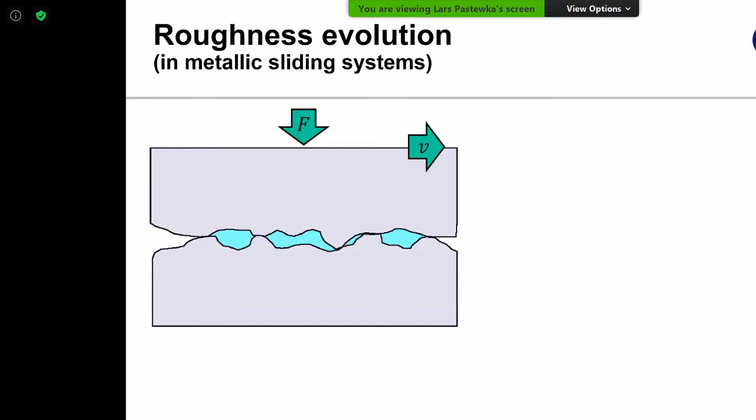Sorry, Lars, can I just stop you a second? The screen is slightly the wrong shape. Hopefully everyone can see all of the slide now. Just give it about 30 seconds, Lars, to make sure everyone can see everything. There was a bit of the slide cut off. That is probably not a big issue. Should I continue? Give me 2 minutes, a little less than 2 minutes.

Okay, yeah, that looks better. Okay, yeah. So let me continue. So the surface roughness and friction.

So the picture that's typically drawn looks like this: two surfaces touching each other, two rough surfaces, and of course the area of intimate atomic contact is limited to the peaks of the asperities of the two mountain ranges that touch here. Then we have a force pushing them together, and of course a sliding velocity, so this all happens under external load.

What happens, in particular in metallic sliding systems, is that of course the surface deforms. What you see down here is a picture I've taken from David Rigney's work, who has looked at mechanically mixed layers for much of his career. The picture that's typically drawn is that of a plastically deformed zone, and what these lines indicate is sort of the shape of the plastic deformation.

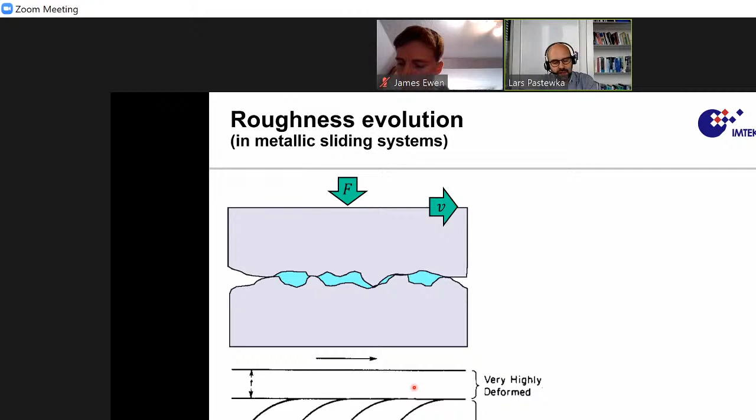It seems to indicate that plastic deformation is a laminar process. There's, of course, if you look at this carefully, something called a very highly deformed region where something else may be happening. But let's pause for a second and think about what it would mean if the plastic deformation was really a laminar process.

So we have these rough surfaces, we have these asperities touching, and because of plastic deformation, what would happen is these asperities deform and flow to fill in the void region that you see here. So it's probably to be expected, in a naive way, that the two surfaces would at some point become perfectly flat. And of course, they don't do that.

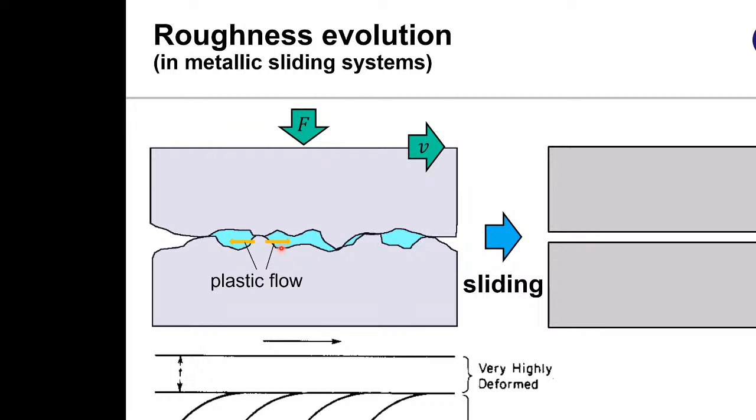I'll show you in a second an experimental example where this is shown. The reason they don't do this, and what I would like to focus on today, is that subsurface plastic deformation is not a laminar process. This idea of plastic flow being laminar, which is encoded in continuum models, J2 plasticity models of deformation, is something that doesn't work at small scales.

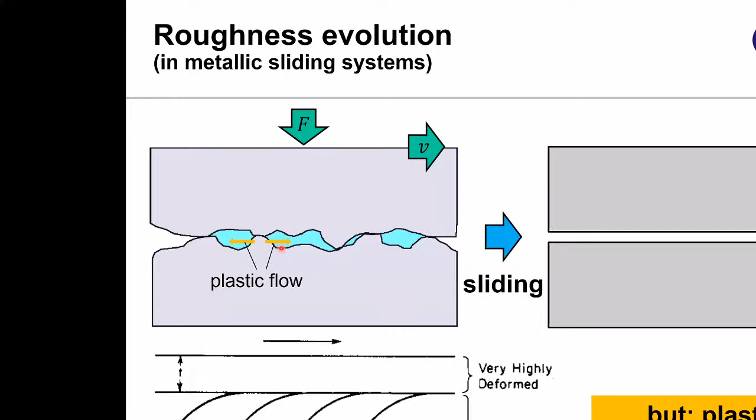So I promised a little bit of an experimental result.

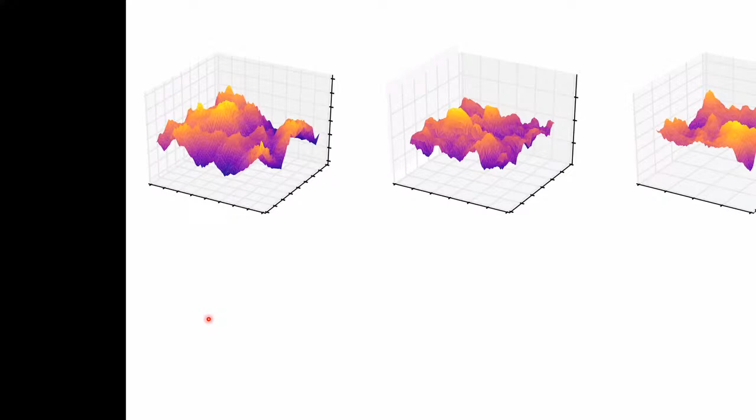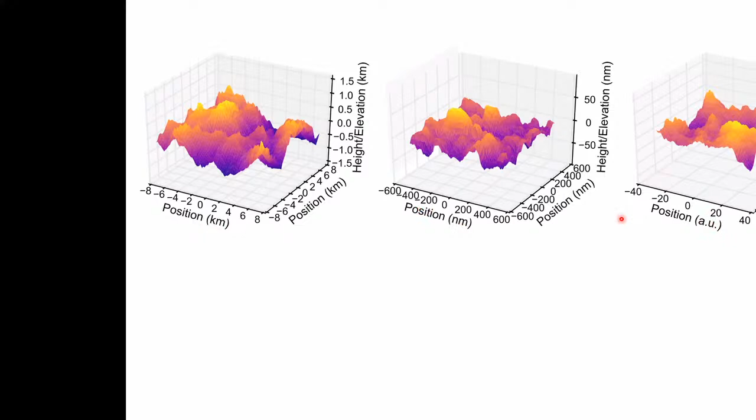So if I show you the scale of these measurements, it immediately becomes clear that this is something completely different. The left one is in kilometers, this one is in nanometers, and this is AU, arbitrary units. The left plot is actually a section of the Alp mountain range. This is an AFM scan of an ultra nanocrystalline diamond surface from Tevis Jacobs' group in Pittsburgh, and this is a computer generated surface that I generated in the computer.

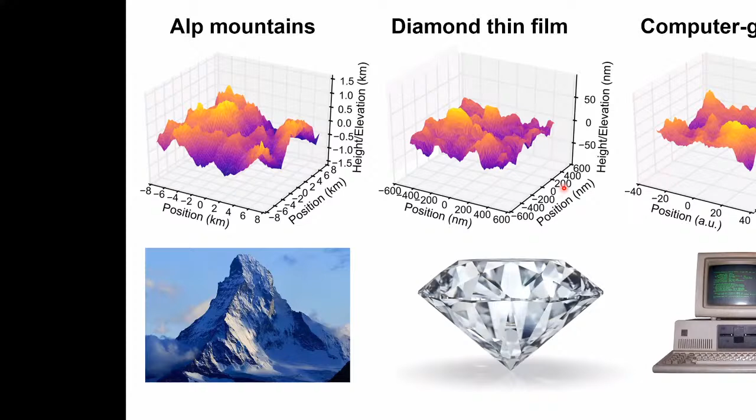So the goal of this exercise is to illustrate that if I take something really large scale, this Alp mountain range, and rescale the positions by a certain factor, and rescale the heights by an appropriate factor, then I get something that is virtually or statistically indistinguishable from something like this ultra nanocrystalline diamond surface. That's a property called self-affine scaling, in this case, statistical self-affine scaling.

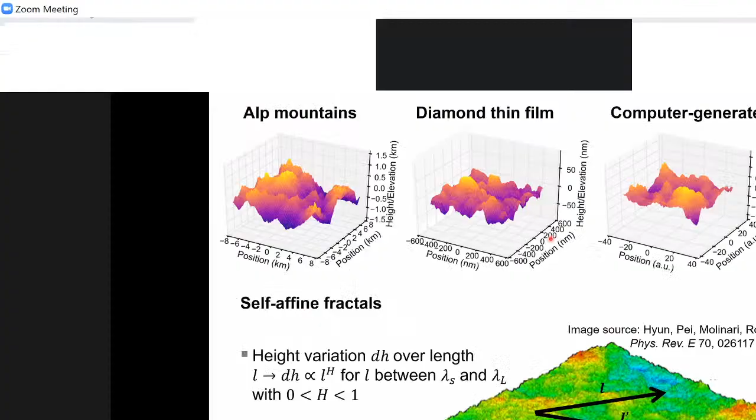And what I've just illustrated to you in a visual manner can be made a bit more formal. We can ask the question: if we look at a surface, what is the variation in surface heights, or the difference in height between two points? Imagine I'm sitting at the point to the left of this black arrow, and I ask what is the difference in height to a point at the end of this arrow. I do this for all points a distance L away. Then what I get, of course, is something that looks like a rough profile.

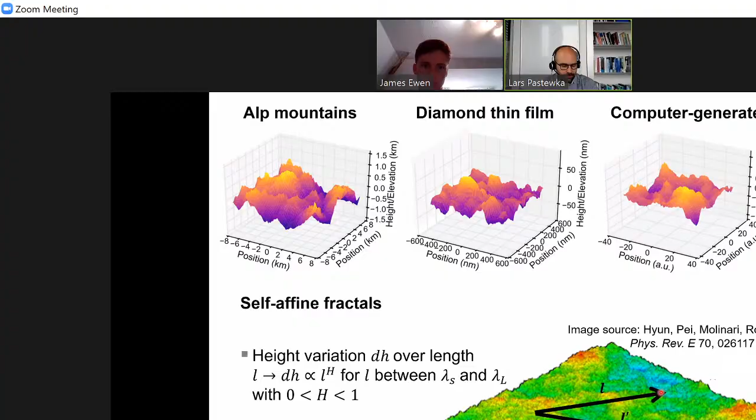So I get different height distances depending on where the arrow sits. But I can ask the question: what is the amplitude of that height variation at a distance L? It turns out that for many surfaces, particularly those with self-affine scaling properties, this height variation delta h scales with the distance to some power of capital H, called the Hurst exponent, and H is between 0 and 1.

This seems to indicate that these distances grow unbounded, but let me illustrate that this is still a flat surface. If we ask what is the mean height over this distance L, so delta h over L, then we get scaling like L to the power of H minus 1. This is a negative number, so it actually goes to 0 as we look over larger and larger distances. So these are nominally flat surfaces.

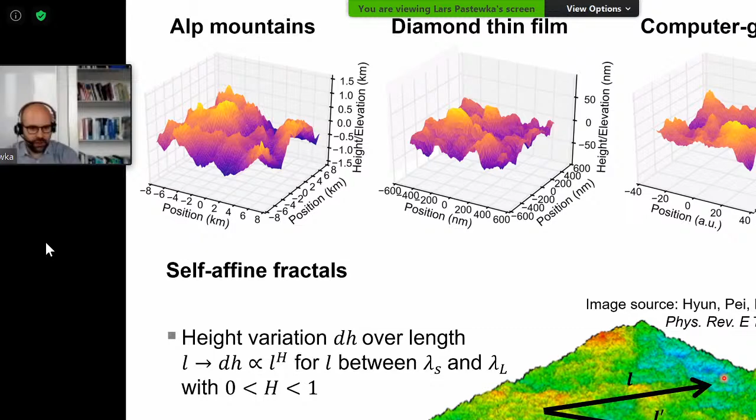This is one way of looking at this self-affine scaling. There are different ways of detecting this. This would correspond to computing something called the autocorrelation function, the height difference autocorrelation function on the surface.

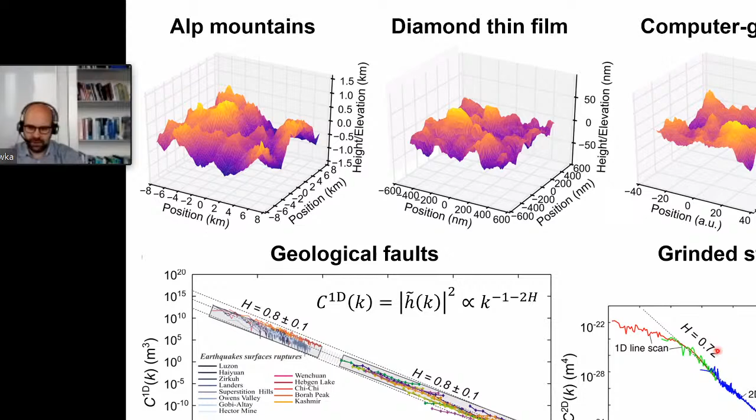So why is this the case? What are the origins of surface roughness? There's different things that have been done in the past, and a lot of work in the literature on surface growth. If you think about CVD or PVD growth, there are growth models the physics community has looked at, and they do lead to self-affine surfaces, often with a Hurst exponent around 0.5.

The two most famous models are probably the Edwards-Wilkinson and Kardar-Parisi-Zhang models. But the surfaces we look at are mostly not grown. There are erosion models that also predict self-affine scaling; one example from Persson's work predicts a Hurst exponent close to 1.

But I would like to argue that most of the interfaces we look at are actually interfaces that have experienced deformation. They have been machined, polished, and then used in a tribological context, so they have been worn down, experiencing plastic deformation and fracture. So why would deformation lead to surface roughness?

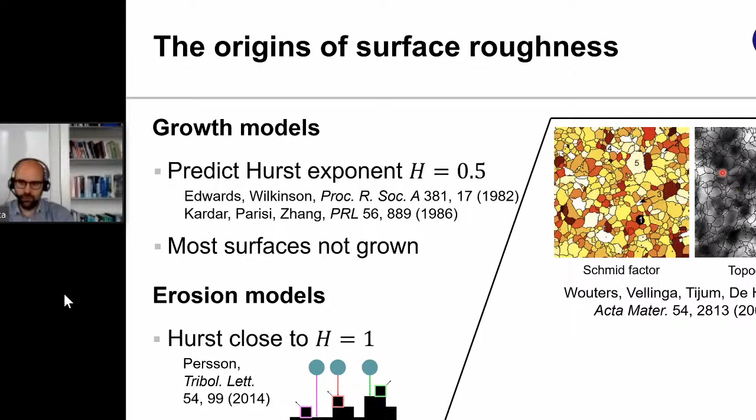The very traditional view of how roughness emerges, in this case in a polycrystalline metal, is: imagine you have a microstructure such as the one shown on the top right, where color indicates grain orientation—here a Schmid factor, which tells us how the grains deform. Let's assume the grain orientation is different, so some grains deform easily under an applied load, while others are more resistant. This leads at the surface to the evolution of a topography, shown in this red image on the right.

I will show you later that we think this doesn't give rise to self-affine surface structure, while it does give rise to surface roughness.

There's some very interesting work now on single crystalline materials. The material microstructure represents material heterogeneity. What you see here is the autocorrelation function of a surface scan, experimental work from Michael Zaiser's group, now in Erlangen, from the compression of single crystalline potassium chloride and lithium fluoride samples. On these single crystalline samples without any heterogeneity, you still find surface roughness after deformation that is self-affine, with a scaling exponent or Hurst exponent close to 0.8.

So we took these ideas. Michael Zaiser has these experiments and has done some modeling of these systems, but nobody has looked at this before with molecular methods. So we said, why don't we just set up a very simple molecular dynamics calculation?

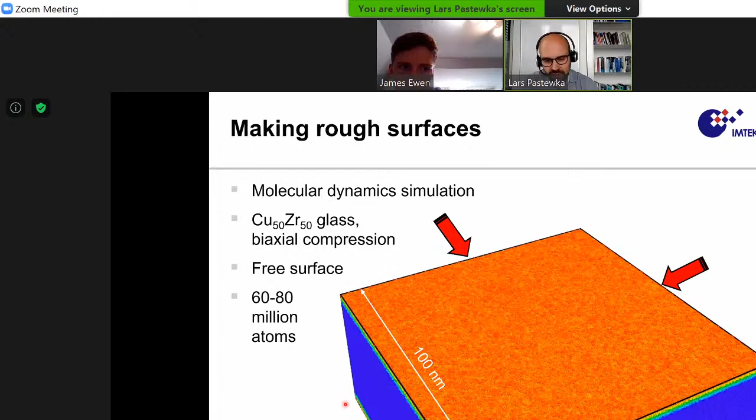This is a homogeneous piece of material, in this case a copper zirconium glass. It's actually a slab with two free surfaces. What you see in red on top here is one of the free surfaces, and the other is at the bottom. We expose it to a very simple type of deformation: compressing it along the axes indicated by these red arrows. In this laminar idea of deformation, the slab should simply become thinner and this surface should move up.

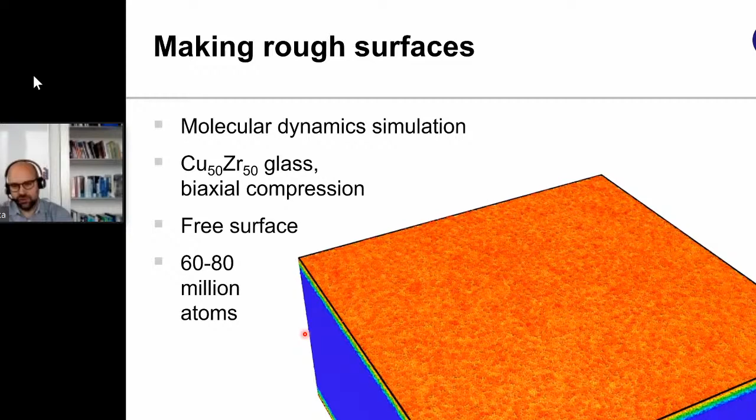But let me run this calculation for you. What you see is that even though this material is perfectly homogeneous, what we find at the surface after this calculation is that the surface has become rough. So there seems to be something intrinsic to the deformation process that leads to surface roughness.

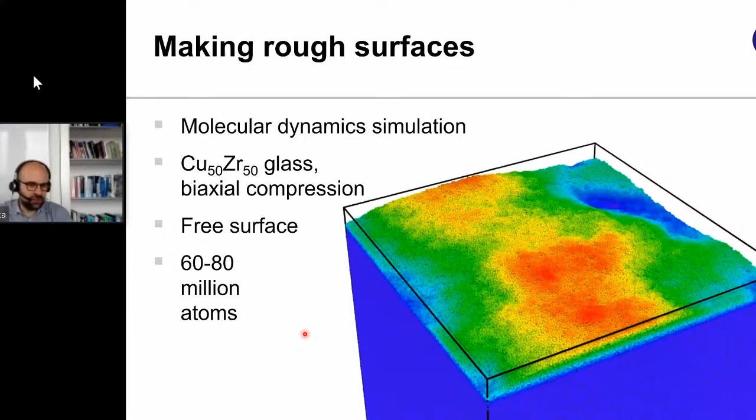Now the glass is homogeneous, but really at atomic scales there is glassy heterogeneity. So we did these calculations for three different types of systems: single crystalline gold with 111 surfaces, a high entropy alloy, and this copper zirconium glass. These systems represent different limits of order: perfectly ordered single crystalline gold, where each atom sits next to each other; the high entropy alloy, an FCC lattice but with random elements—nickel, cobalt, iron, and titanium—having stoichiometric disorder with the composition shown here; and the glassy material that has disorder at the atomic scale.

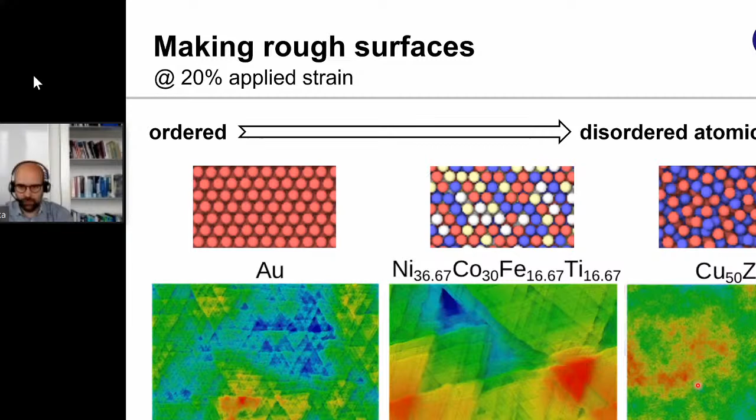All of these develop surface roughness. On the crystalline system, you nicely see these little triangular structures that represent the lattice plane of the crystal. What you see here is a 111 surface, and these are actually the slip planes of dislocations that exit the surface—I'll come back to that in a second. This is the high entropy alloy, which looks similar, and the glass is smooth. While running these calculations, we can monitor stress and also the surface roughness.

These plots show on the x-axis the applied strain in the system. The top one is a classical stress-strain curve. There is an elastic regime, and then we see huge stress overshoots for the crystalline systems because they are defect-free. This is, of course, somewhat of an artificial situation, but it's exactly what we wanted to test. Then these materials flow at almost constant stress as we continue to compress.

This is the root mean square surface height, the amplitude of the height fluctuations. If this is a line scan of our height, it would tell us by how much the amplitude varies—I'll show that to you in a second as a function of scale. This is the height measured over the full size of the samples shown here, initially 100 nanometers by 100 nanometers. You see that the roughness increases as we strain it, but yield is the point where it first emerges. Before the material has yielded, in the elastic regime, there's no surface roughness.

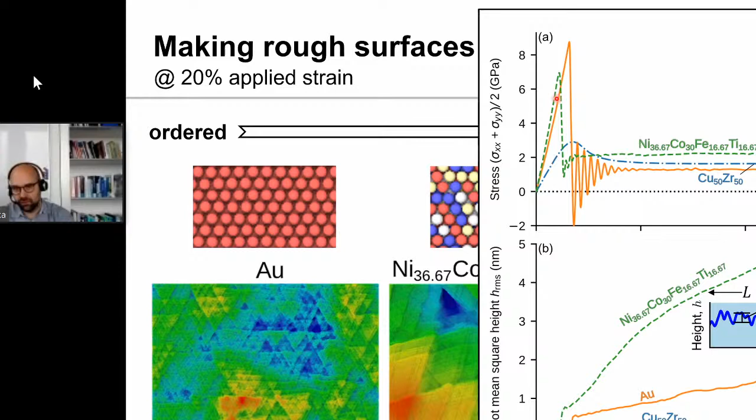of the surface topography. So we can actually do a little more detailed analysis. This HRMS is simply the width of some underlying height distribution function. We can now look at the full height distribution function.

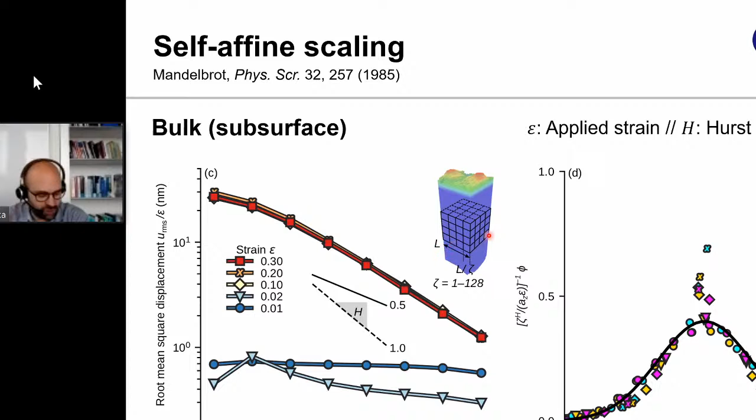And we see something very similar to the surface. We can collapse that onto a single universal curve. So what we see at the surface is nothing else than a signature of the non-affine or non-laminar deformation profile of the subsurface deformation in these systems.

I'll come back to the gold in a second. The gold gives us almost 0.5, and I would like to illustrate why that is with a very simple explanation of what we are seeing here. The copper zirconium is something we are still working on, it's actually highly temperature dependent. I don't have the data on these slides.

Okay, just comparing to Michael Zaiser's work that I've shown before. This was the scaling on potassium chloride and lithium fluoride. This is close to what we find actually for these multi-component alloys in our systems.

Okay, so what's going on here? Why do we get self-affine scaling? It's actually very simple to explain for a crystal in which the dislocations move uncorrelated. If we have a dislocation as the carrier of plastic deformation in a crystalline material, when that hits the surface, it will leave behind a step on that surface, a step with a height that's correlated to the Burgers vector of that dislocation.

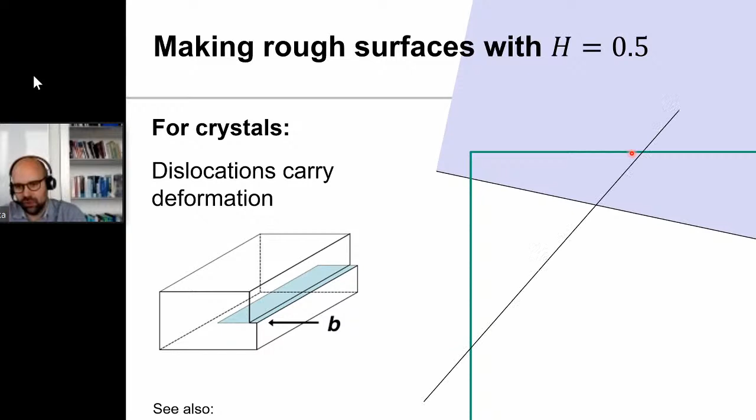So let's make a rough surface on this little square that you see on the right. I'm just throwing onto the surface a random step. When I come from here, when you see my pointer, I'm moving towards the step, I would move up by a little bit by Burgers vector when I move over the step. And now we do this randomly on the surface, and we get a surface that looks like this. Here, the directions are simply chosen from the slip directions on an FCC 111 surface.

But if I look at the power spectrum that I get, I actually get something that is H = 0.5. This makes perfect sense, because what I'm doing, if I'm scanning across this surface, I'm just moving up and down in a random fashion. So this is a random walk, essentially. And random walks are well known to have these scaling properties.

We can also look at this in terms of the Fourier transform, looking at the Fourier transform of a step function. This is 1 over q, and this leads to the H=0.5 result. This is sort of trivial for metals in which dislocations move uncorrelated - you can reconcile it with a laminar idea of material deformation. When the dislocations become correlated, this gives rise to different values of the Hurst exponent.

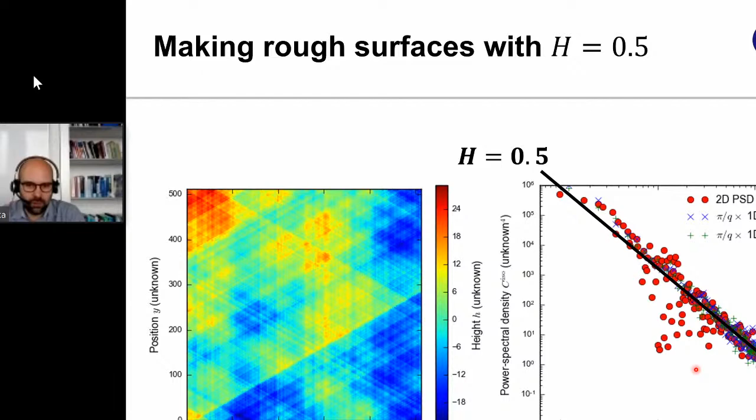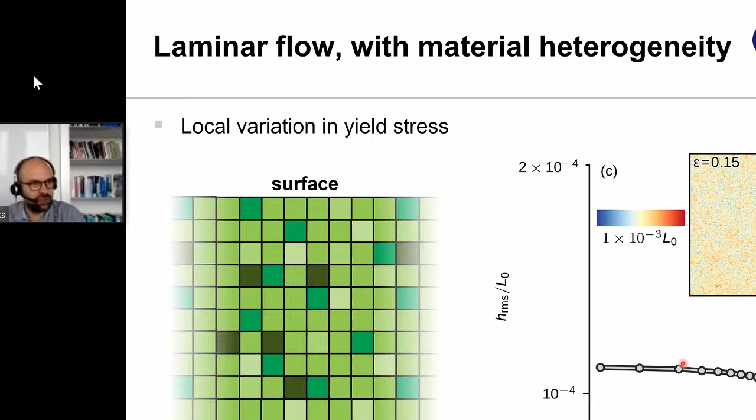Coming back to this question of what happens for laminar models - this is a continuum calculation we've carried out, assuming we have a heterogeneous material in which the yield strength in subsurface volumes, indicated here by colors, differs randomly. Then we compress it. We get a random surface shown on the top right, but our scaling plot does not show self-affinity. So this is the picture of different grains and orientations deforming and giving rise to surface roughness.

I hope I could convince you that this idea of laminar flow doesn't make sense at small scales, and that there is a mechanism that actually leads to the creation of new surface roughness.

Let me, for the last couple of minutes I have, talk about brittle materials. This is, of course, a mechanism that depends on plasticity. What happens if the material is brittle, if we have cracks in the material?

The first point I want to make is that plasticity is a question of scale. This is a picture taken from an old 1949 paper, in which Taylor did an indentation experiment and noticed that with very small indents on soda lime glass, the glass behaved perfectly plastic, while for deeper indents it would fracture.

If you look into fracture mechanics, the stress near a crack tip becomes very large, and there is always, in most materials, a region often called the process zone, in which something happens that is not elastic deformation but plastic deformation. So at small scales, even in cracks of brittle materials, you will have plastic deformation.

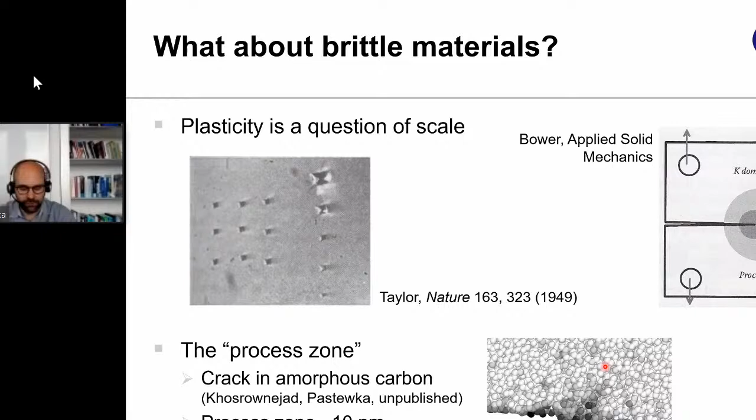So you have to do something, and this leads me to some beautiful calculations from the group of Ramin Aghababaei, who is now at Aarhus, and Jean-François Molinari at EPFL, who used a specialized model. They call it molecular dynamics - I would probably call it a discrete element model, sorry Jean-François if I'm deviating from your nomenclature. But what they did, and what is very clever, is they designed their model so that the process zone is small, allowing simulation sizes much larger than the process zone size.

This is one of their calculations from Nature Communications published last year, in which they set up a rough surface. They slide on top of each other, and they see the formation of these wear particles. But what they did in this paper is they actually analyzed the surface roughness after their sliding calculation finished - they slid for a very long distance. The right-hand side shows the power spectral density of their surfaces.

The power spectrum is a function of Q, and they also find self-affine scaling with H between 0.5 and 1, on the order of 0.7. So this means at small scales we have plasticity - there are intrinsic plastic processes, like the ones I described to you.

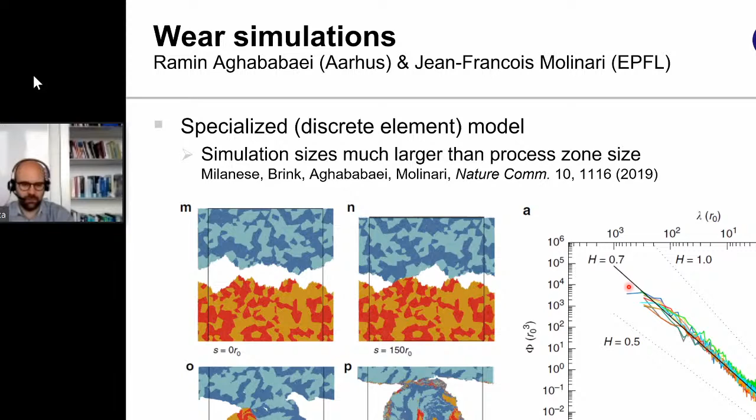At larger scales we have fracture mechanics, which is sort of the gist of this model. This seems also to be corroborated by experiments. These are two examples from the literature. The left hand is a crack on silica glass from Laurent Ponson, Daniel Bonamy, and Elisabeth Bouchaud that shows there seems to be a scale below and above which the crack properties change. This is the delta H, the autocorrelation function as a function of distance. You see that these scaling properties change at some point, and this length scale probably corresponds to the size of the process zone. The right one is sliding rocks, again from Emily Brodsky's group, that shows something very similar: a length scale below which the surface becomes isotropic, above which it's anisotropic, but there's also a change in scaling exponent for some of the directions. So there seems to be a change in mechanism at something on the order of the process zone size.

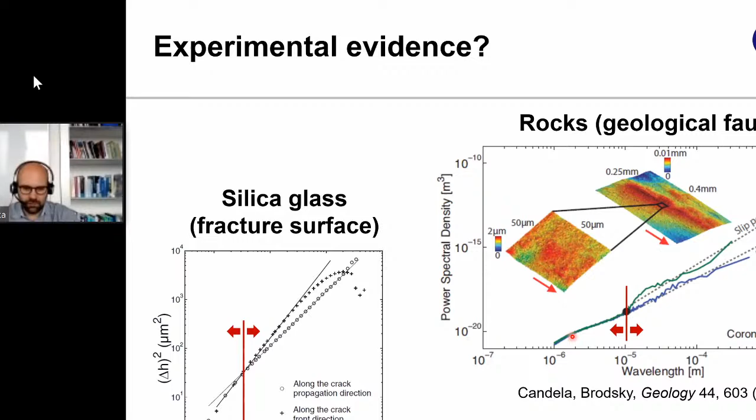What I've talked mainly about today is the mechanism for the evolution of small-scale roughness. Jean-François and Ramin have done beautiful work on what happens at larger scales, which is what has happened recently in the simulation community. What's left to be done, of course, is to think about how this can be translated into experiments and what practical implications this has. But I think that thinking about how the surfaces we work with, or the morphology, actually develops and evolves, and that morphology, in the end, controls friction and wear and other things, is important and is something we should continue to think about.

So with that, I'm at the end.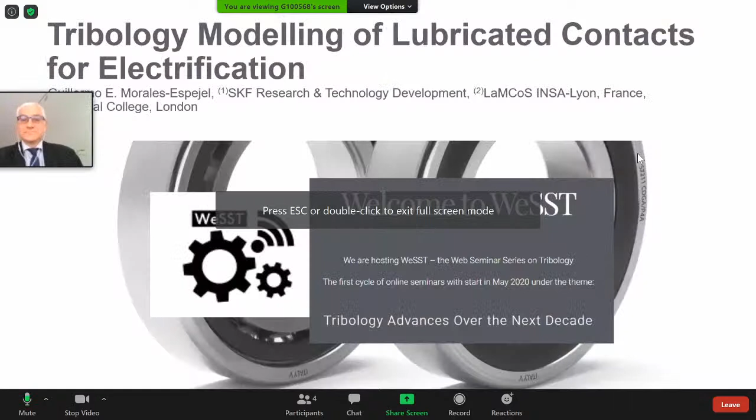Thank you very much, James, and thank you for the invitation, Chiara and James, to participate in this webinar. I will talk to you about tribology modeling of lubricated contacts for electrification. This is basically a summary of the work we are doing in SKF to tackle the new challenges brought to us, mainly by electrical mobility, as you will see.

The presentation is divided into 4 chapters: we will discuss the challenges in lubricated contacts, modeling of lubrication, modeling of failure modes, and then at the end, modeling of life of these contacts.

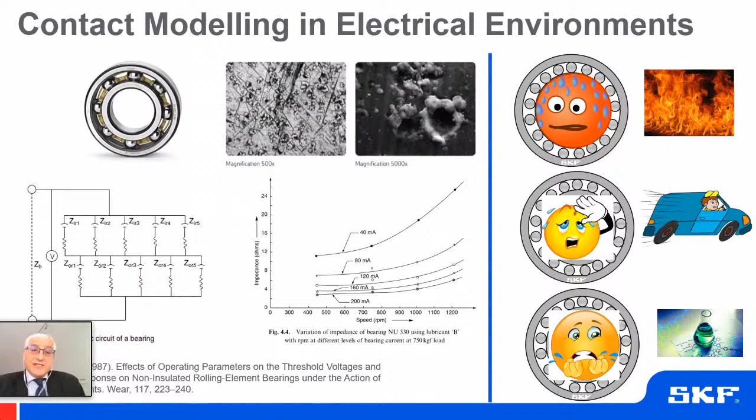Let us take the first one: challenges in lubricated contacts for electrification. When I was designing the talk, I had this dilemma whether to focus on describing the actual process of damaging a contact through electricity and modeling the electrical circuit, or focusing more on the new challenges brought to us in the operating conditions for these contacts, like different temperatures, different speeds, and different chemicals. Since there is quite a lot of literature on this topic, I decided to go for the other one, the challenging application conditions that the contacts have.

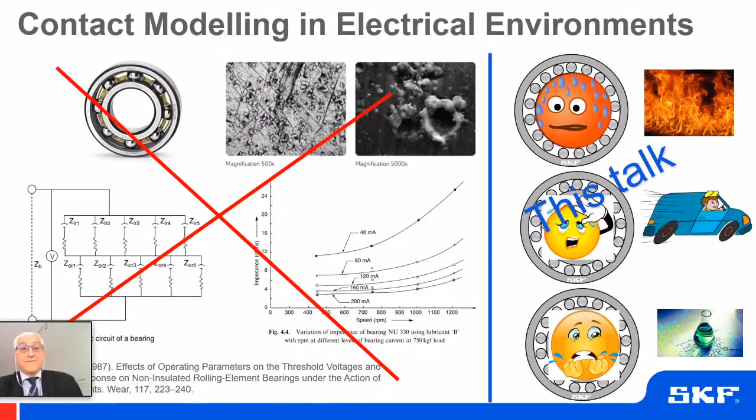So the first thing I would like to do is discuss briefly with you what are those tribological challenges brought to us by, for instance, full electrical vehicles.

If we start analyzing these vehicles, we soon realize that the electrical motors are sealed for life, and the bearings in the electrical motors are subjected to very high speeds, very high accelerations, and very high temperatures. That brings contact challenges about what to do to have long grease life, long surface life under variable conditions, and especially issues like surface distress, seizure, or adhesive wear that these contacts will see at very high speeds.

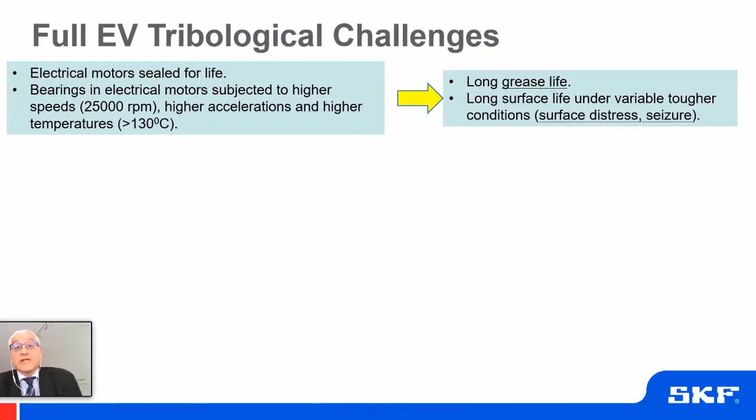There is another important element: these electrical motors are running at very high speeds in order to be efficient, and that brings also the possibility to introduce higher torque and higher loads in the contacts. So again, what to do about the life of the contacts under those conditions.

Then there is the fact that we are introducing quite a lot of new materials in the system, like copper wires, coolants, and advanced polymers. And then we need to deal with the compatibility with electrical currents and magnetic fields, which brings important challenges in the contacts because there are unforeseen consequences in lubrication. There is also the possibility of increasing solid contamination due to corrosion and the other elements we have there.

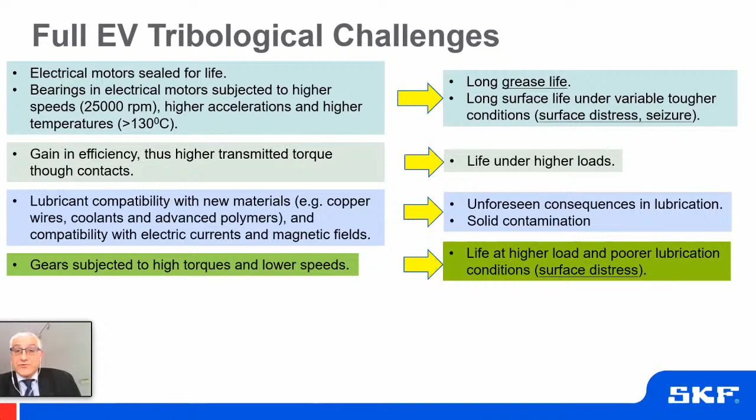Now, since we are running the motors at high speeds, there is also the need to lower the speeds in the system by having high transmission ratios in some gears. So some gears will actually be running at lower speeds and high torque conditions. That brings very tough conditions for the contact life, again regarding the life of those contacts under poor lubrication conditions and surface distress.

There is also the possibility of electrical damage in the contacts, fluting, electrical erosion, etc. And then we need to understand how this damage propagates in the surface.

Then we need to run these contacts with less allowed noise. We need to improve the lubrication conditions in the contact, but with the contradiction that we are more and more using lower viscosity lubricants. So surface distress is coming up again as an important potential failure mode.

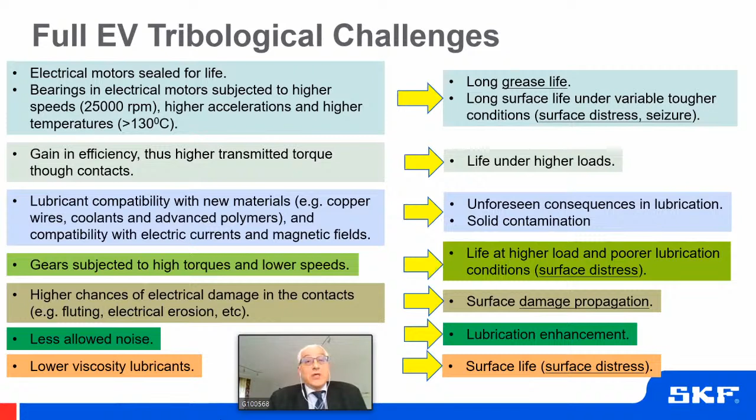Now, when we have hybrid electrical vehicles, we add an extra element, which is the combustion engine, but the conditions will not be too different from these ones. So I would like to move on to the summary of the new challenges.

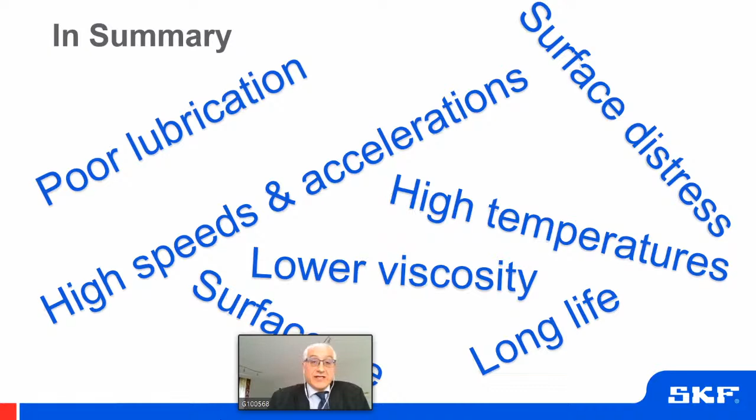We are talking about poor lubrication conditions in the contacts, high speeds and accelerations, surface life, high temperatures, surface distress, long life, and lower viscosity. This is the new reality when it comes to electrical vehicles. Now, even before electrification, we had already very important challenges in those contacts.

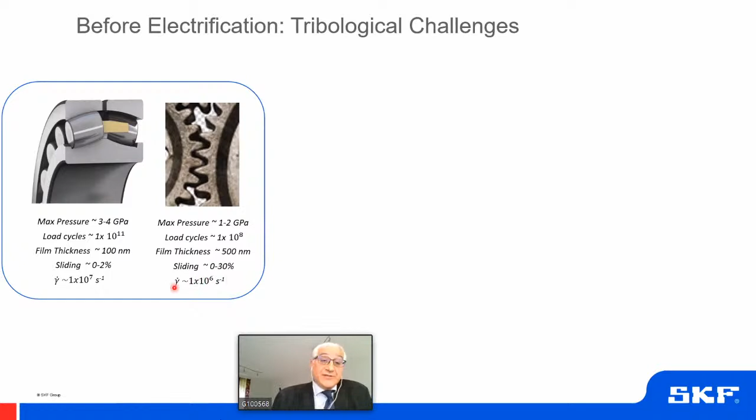Gears work under slightly lower loads, 1 to 2 gigapascals. The number of cycles we expect to endure is also a bit lower, 1 times 10 to the power 8. The film thickness is a bit thicker, but we need to remember that the roughness of gear surfaces is higher, so in reality the lambda ratio is about the same as bearings. The sliding conditions go from 0 to 30%, and the shear rates are a bit lower than bearings.

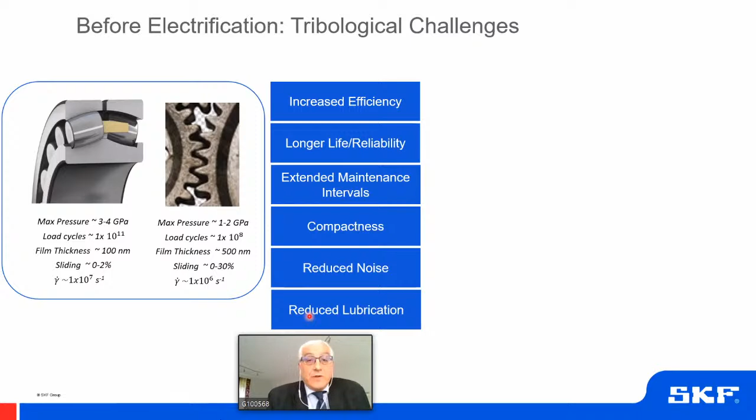All this, with the megatrends of increased efficiency, longer reliability and life, extended maintenance intervals, compactness, reduced noise, and reduced lubrication, together with the fact that at least in bearings the film thickness has been reduced over time, brings us to a situation where most of the failures we see in these machine elements are surface-initiated failures. So tribology was already important.

Now let us see how we really understand the lubrication in these machine elements, because if we understand the lubrication, we can understand many of the potential failure modes. We need to understand lubrication not only from the point of view of calculating film thickness and pressure inside the contact, but also what is happening outside the contacts, because that will actually determine in many occasions what actually happens in the contact.

If we are talking about simulating millions of load cycles, we cannot do this in the old-fashioned way using numerical techniques, because it takes too long for one calculation. We need a more pragmatic approach based on semi-analytical solutions, and this is what we have been proposing for many years.

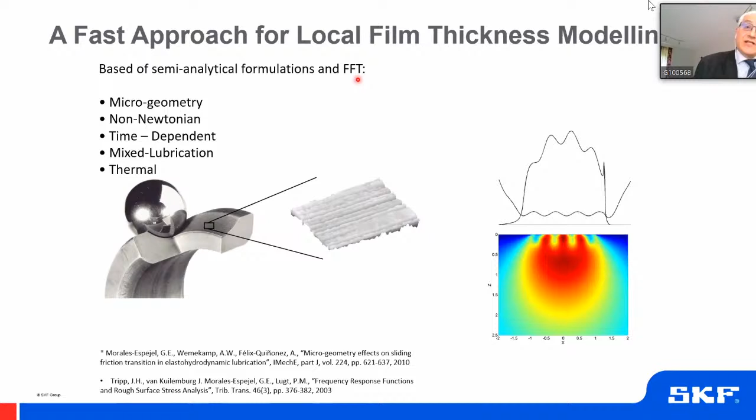Models that can actually consider the microgeometry of the contact, that also can model the non-Newtonian behavior of the lubricants, time-dependent solutions, mixed lubrication, and thermal effects, actually modeling the whole topography in a contact. To do that, we rely, as I said before, on semi-analytical solutions based on fast Fourier transform. I would like to give you a brief idea of the concept.

The actual model is a bit more complicated than this, but this is just to show the basic idea. If you have two rough, lubricated surfaces, they will produce a pressure distribution that has pressure ripples. We do not want to model the whole geometry of the contact because that is very time consuming. We want to focus on modeling only the ripples, the pressure ripples and the film thickness ripples. For that, we focus our attention on the central zone of the contact.

Here we have very high viscosities, and if we have very high viscosities, the Poiseuille flow term in the Reynolds equation tends to be small. So we can simplify this equation into just a wave equation, a transport equation, which is linear. And if we know the solution for a sinusoidal, we can apply the powerful Fourier techniques to solve any topography we want. Now, this is a very basic idea.

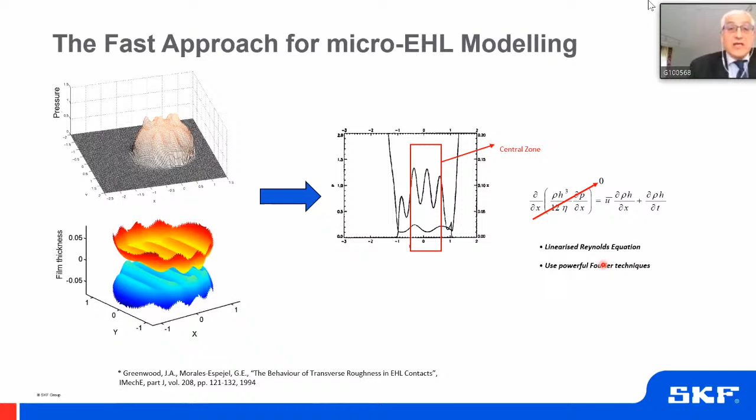The reality is more complex than this, because if you want to deal with non-Newtonian fluid, you immediately realize that you cannot totally remove the Poiseuille flow. Parts of it will have to remain in order to model the non-Newtonian behavior. So we need to calculate the equivalent viscosities in the two directions, but more importantly, the overall solution for the ripples is made of two important parts.

One is what we call the moving steady state, or particular integral, which basically describes the deformation of the roughness as it goes into the contact and the generation of these pressure ripples. There is another very important element that we initially ignored but then realized was important: the disturbance of the flow introduced by the roughness every time a ripple enters the contact. It produces a flow variation that travels through the contact with the mean speed of the lubricant. Adding those two together, we get the full solution of the problem.

A lot of the work on this is due to Professor Hooke from the University of Birmingham, who has been working hard to develop these complex models.

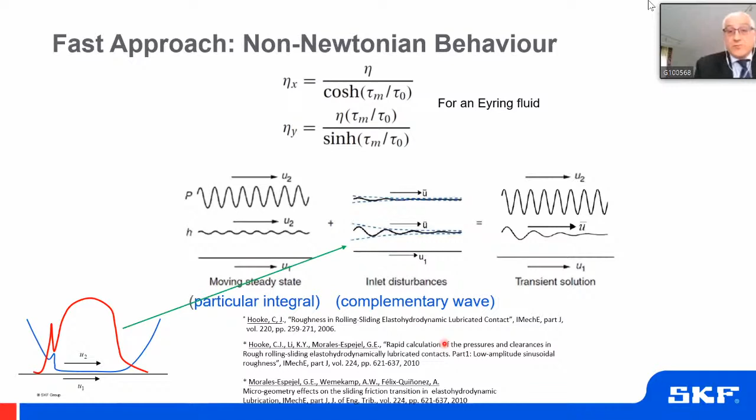Now, this is just an example of what the model can do. For instance, if you have an indentation on the surface, you can see that the indentation produces pressure ripples. You can also see the profile of the pressures and the stresses that that produces.

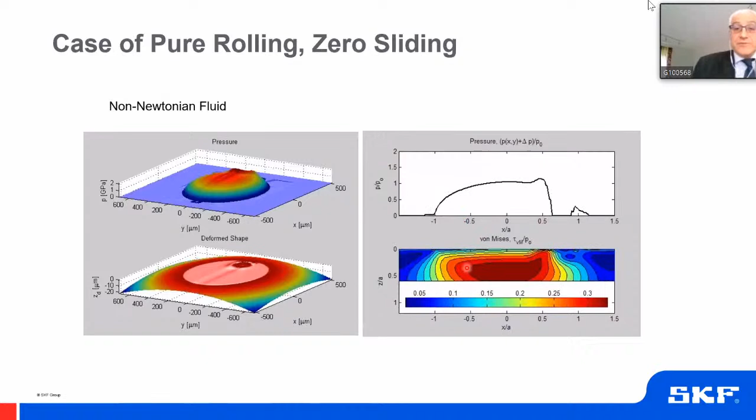And that has important consequences in fatigue as well. Now, we were talking about modeling what happens outside the contact. This is basically the product of what we call kinematic starvation. When we are running machine elements at very high speeds, there is a chance that we induce what we call kinematic starvation. A good example is a rolling bearing.

We define this quality of lubrication parameter, kappa, which is similar to a power of lambda, if you want to put it in more simple terms. Here you have the speed, basically the multiplication of the RPMs by the mean diameter of the bearing in millimeters. And that gives you a measure of the speed.

So we know that when we increase the speed, the film thickness will increase until a certain point, but then starvation will take control, and it will actually reduce the film thickness if you keep increasing the speed.

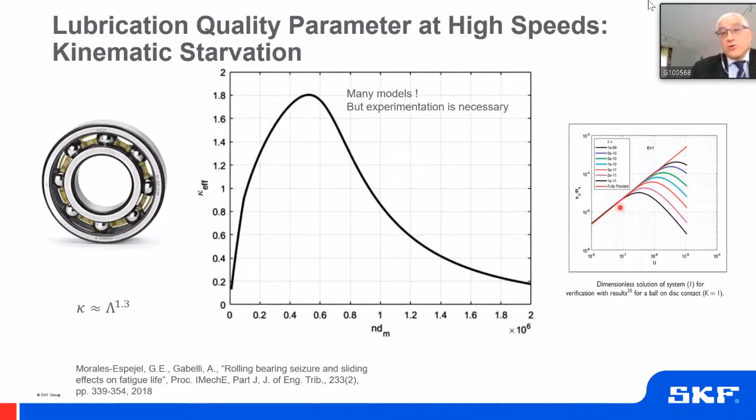This is an example of what is possible to do in the laboratory in a tribometer consisting of a disc and a ball. You can pretty much model the conditions when you increase the speed. You can model all starvation conditions, if you are clever enough, in a very controlled way.

Now, once we understand and can model lubrication in machine elements, it's time to move towards different failure modes related to the surface. One failure mode that we saw many times in our first slides is what we call surface distress.

It's also called micropitting, especially in the USA. We also call it gray staining, microspalling, surface fatigue, etc. It has many names, but it's basically surface fatigue at asperity level. There is a very good, well-known definition of this failure mode for rolling bearings in this ISO standard. There are also ISO standards for gears describing micropitting.

It looks like this when you have a surface. You see these shiny bands here. If you look closer, you see some pits. If you go into the microscope, you see some clear microspalls. And when you make a cut in the transverse direction, you see that these are really shallow cracks. This is typically what we call surface distress.

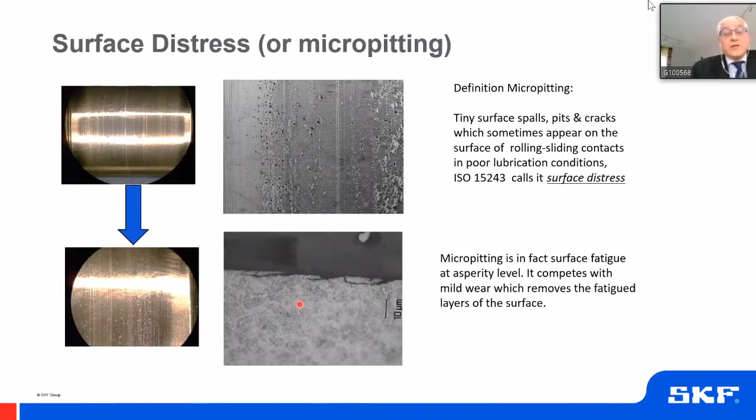It's important to say that although this is basically due to poor lubrication conditions and fatigue at asperity level, there is always a competition between fatigue and wear, the mild wear that modifies the topography only. If you have too much wear, you may not see surface distress. If you don't have any wear, you may see surface distress very quickly because you don't have enough flattening of the topography.

Something important to say is that this failure mode depends pretty much on the lubricant in your system. This is an experiment published in a paper with my colleagues, using a micropitting tester that has 3 rings and 1 roller in the middle. We try to induce micropitting, or surface distress, in the roller.

If you run an experiment with exactly the same operating conditions, the same roughness, and even the same oil, but just change the additive composition, you can expect very different behavior for the same conditions. That's precisely because the additives locally modify the friction coefficient and the wear coefficient, which has consequences for the stresses on the surface.

Another way to study micropitting experimentally is by introducing indentations on the raceways, because this immediately generates micropitting around this displaced material, especially in the area that is normally the exit of the overrolling. If you have a ball overrolling in this direction, this will be the exit point, which we call the trailing edge of the dent.

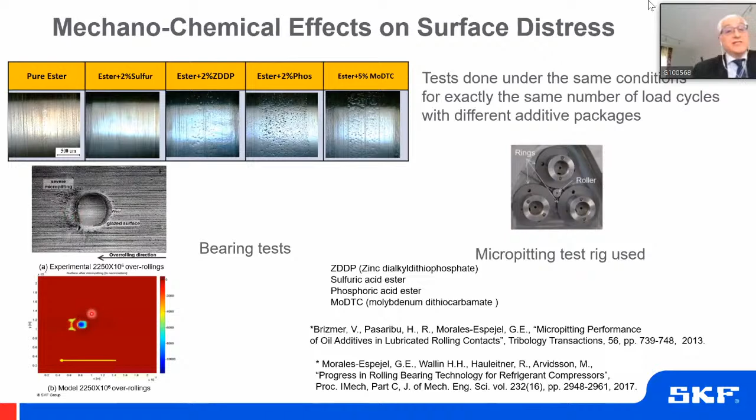Normally here you generate more surface distress, as can be modeled as well—the model will also give you more surface distress here. This is due to the fact that we have slightly higher hydrodynamic pressures at this location.

But if you really want to model this phenomenon, you need to take into account many things. You need to take into account the actual topography that you are testing, and also the build-up of the tribofilm layer from the additives.

For that, we use the work of Zhang and Professor Spikes at Imperial College, who established that the tribofilm layer reaction depends on shear stress and temperature. It's important to say this because in the past we believed it depended on pressure, but he has shown it depends on shear stress. So we need to be able to calculate the local shear stress.

This generates a patchy tribofilm layer, as indicated in this rough diagram, where we see areas separated by lubricant, and other areas which are more like dry contact. Therefore we have locally different friction coefficients and wear coefficients, because it can be the case that you have dry contact between tribofilm layer and tribofilm layer, tribofilm layer and steel, or steel and steel.

So you need to be able to measure these friction and wear coefficients in lab experiments. But once you have that, we can use this model. You basically measure the tribofilm layer, you measure the topographies, and we introduce these topographies into the mixed lubrication model, the fast mixed lubrication model, together with the lubricant rheology.

Together with the operating conditions and the material, we are able to calculate the stresses and eventually the stress history of the roughness going through the contact. With that, we go to a fatigue criterion to assess the damage locally and accumulate this damage over time. If we have reached the number of load cycles, we report the results; if not, we increase the time.

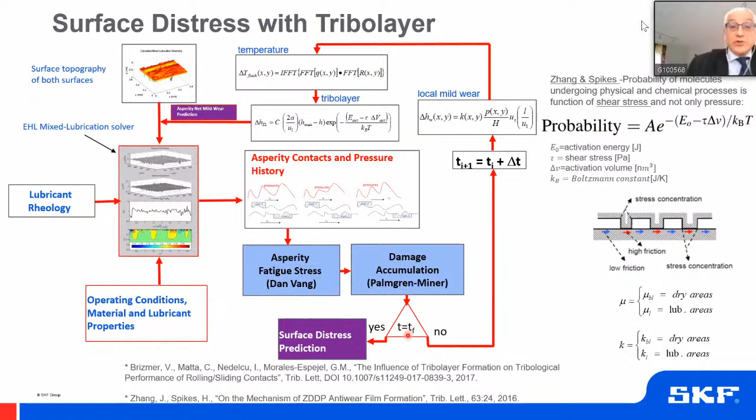We apply a local wear model, calculate the local temperatures, and calculate the local increase of the tribofilm layer. Then we repeat this process many times until we reach the simulation time. Interestingly, at the end of the day, we can basically simulate things like what we see in the experiments.

Again, our tester here—this is a topography we started with. This is just a very short snapshot in time of the shear stresses at the surface calculated by the model. You can see how the tribofilm layer grows on the rings and on the roller, and it's much faster on the roller because it sees many more cycles.

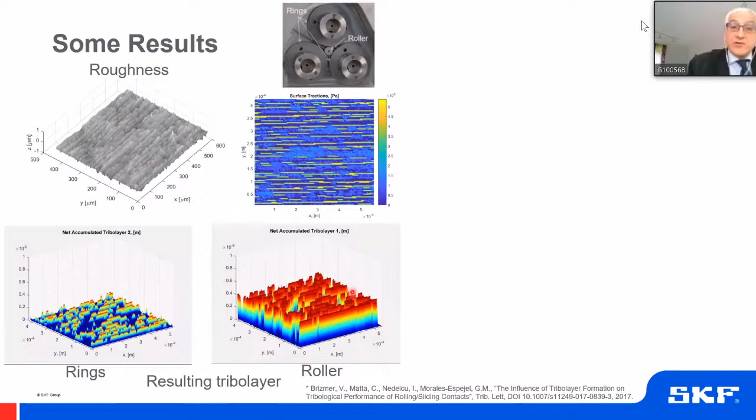But the important thing is not to stop here, but actually to try to make the link with performance, because at the end of the day, this is what we are after.

For instance, it's interesting to simulate the same oil with a typical additive, ZDDP, but at different temperatures, and then compare with the experiments. We know that at higher temperatures this additive is more reactive, so you generate thicker tribofilm layers, which prevent wear but more easily induce surface fatigue. This is what you see in the experiment.

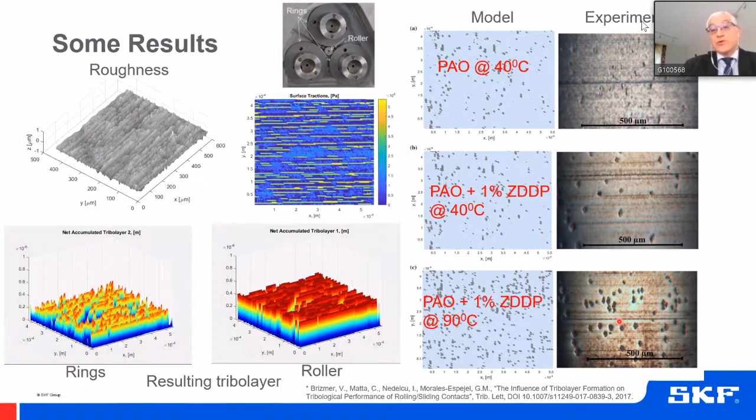Now, the material so far, the steel has been considered homogeneous. We have seen in the previous presentation that it is far from homogeneous, and we are trying to get closer to simulating different aspects in bearing steel and gear steel. For instance, it is made of different phases oriented, or different crystals oriented in different directions, having different properties, and it has inclusions, it has carbides, etc.

So we have done that with the help of our colleagues in the University of Twente, with Professor Kees Venner, where we can actually model in a simple PC computer up to 500,000 nodes or even more, depending on the modeling, if it is transient or steady state.

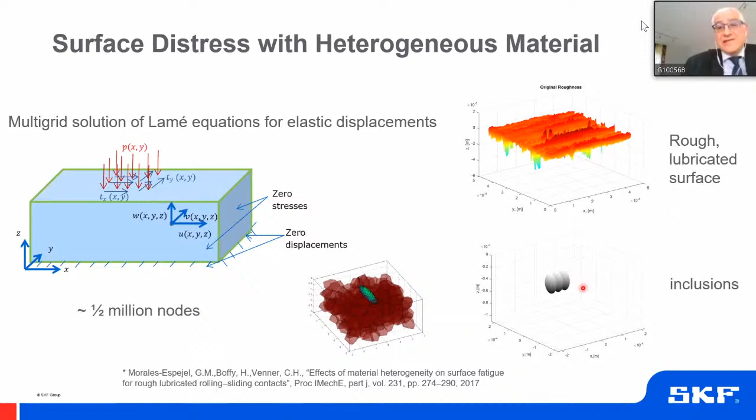And what we try to do here is to take a typical bearing topography, and then we introduce some inclusions made of a stiffer material than the matrix, and then let us investigate what happens with those. So you can see that this is a lubricated problem.

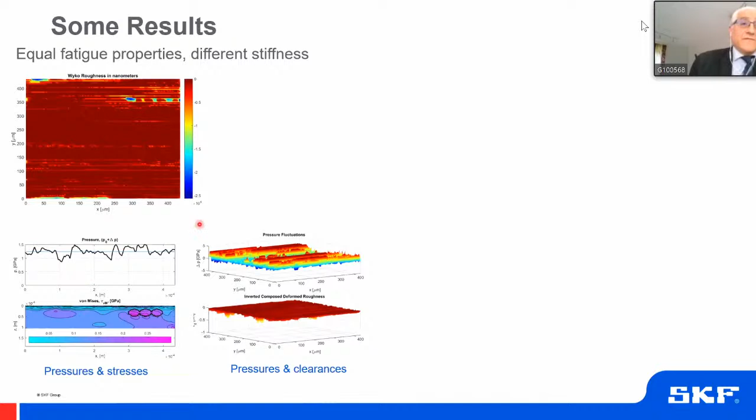So you can see the hydrodynamic pressures here. You can also see the inclusions and how they concentrate the stress because they are stiffer than the matrix. But for this particular case, you see the clearances and the pressures. For this particular case, we did not generate a failure.

Now, the same condition, but now we introduce equal stiffness, so you will not see this stress concentration because the stiffness is the same, you can see here. But now we introduce lower fatigue properties in the area where we have the inclusions, and then you generate the failure immediately here. You can see the failure.

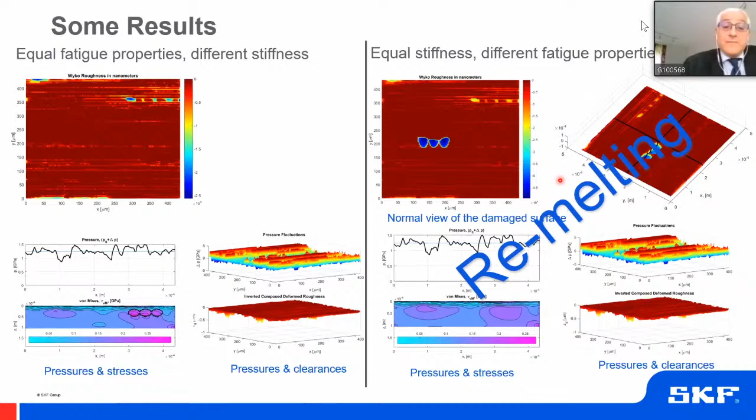And this is typically what you will need to do if you want to model, for instance, the remelting of material coming from an electrical discharge in the contact. Once you generate a crater from electrical discharge, you basically remelt the material and you soften it, and it will have the same stiffness, but much lower fatigue properties than the rest. So it's interesting just for the record.

There is another important failure mode that we see appearing in these tribological conditions, which is what we call seizure failure mode, or other people call it scuffing, adhesive wear, or smearing, etc. There are many names, but here we refer to the adhesive wear really produced by contacts running at very high speed and very high load.

And if you remember the lectures in elastohydrodynamic lubrication, we see that in the past there were many people, and many people still now, running experiments increasing the sliding speed in the contact and increasing the pressure until the contact failed. It fails by a very quick increase in friction and then eventual catastrophic failure. This failure is a thermal failure, produced by high temperatures.

There is a sort of line here that you cannot cross, because the contact will fail. It depends obviously on the temperature at which you are doing the experiment, as well as the lubricant, the additives, and many other aspects, the roughness as well. But in reality, for every contact, there is one line here, and that is called the transition diagram.

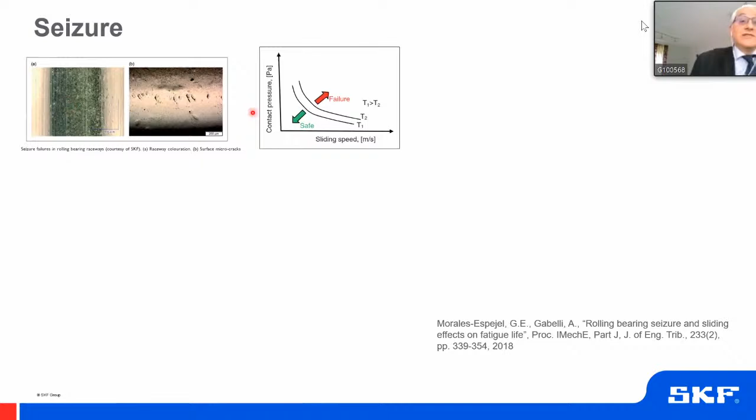Now, it is very important to develop these transition diagrams for specific machine elements like rolling bearings or gears. In a rolling bearing, you will see the failure starting to appear like this one, with tiny micro cracks here. But if you look into the raceway, you will see discoloration due to the high temperatures. This is an indication that this is not regular surface distress, but actually the beginning of what we call seizure failure mode.

The way to model this is relatively simple as well. You isolate the contact with the highest load. You need to model the starvation, because we are running at very high speeds here, so starvation is very important. From that, we calculate the percentage of metal-to-metal contact that we may have in a mixed lubrication model, an average friction coefficient, and then we can calculate, or you can use the local friction coefficient if you have a numerical scheme, and then we can calculate the local temperatures on the surface.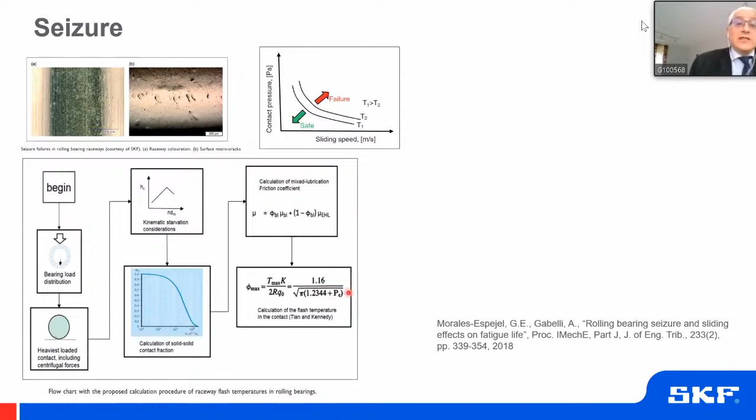And if you draw these temperatures versus speed and pressure, we get these isothermals, which is basically the transition diagram. The only thing you need to do is to run an experiment to know which of these isothermals is the one that you are looking for, as the transition diagram of your problem.

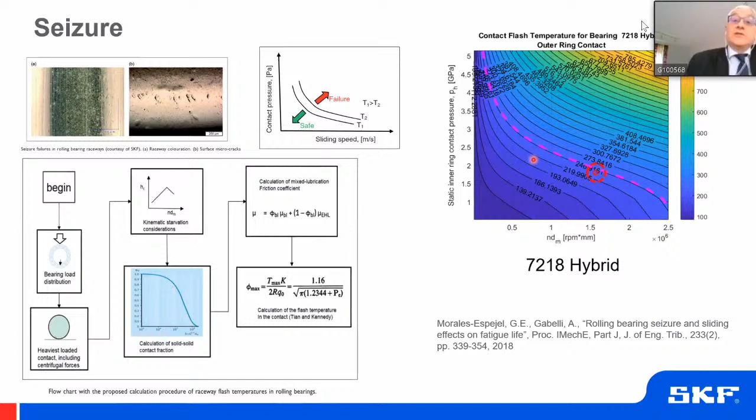And in this case, this is actually an experiment. It comes out to be around 250 degrees, more or less. But that can change with the lubricant that you are using. This is a very important tool for you, so as not to go beyond the limit of the machine or the machine element that you are modeling.

With this, we are getting closer to actually trying to calculate the life of the contacts. If you remember, the life of one single machine element like a bearing or a gear is almost impossible to calculate individually. You need to calculate the life of a population, because seemingly equal bearings have small differences, even if they are working under very similar operating conditions.

There are always small differences that will make the individual life of the elements very different from one to another. So what we normally do in bearings, and also more and more in gears, is to calculate the life of populations. In this case, we calculate with 90% reliability. This is why we calculate the L10. It means that 90% of the machine elements will survive this life.

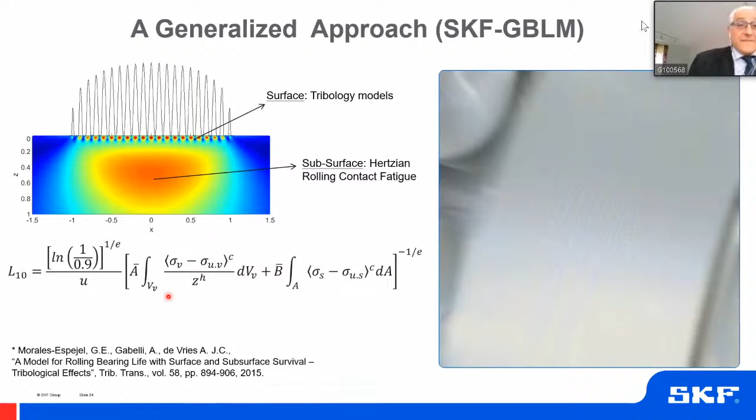And the way we used to do that in the past was basically by using subsurface fatigue, Hertzian stresses, and that will give us this damage integral that eventually will give us the life. But more and more, we realize that the surface is important. Before, we used to penalize the subsurface fatigue with a factor here due to poor lubrication or contamination or something else coming from the surface.

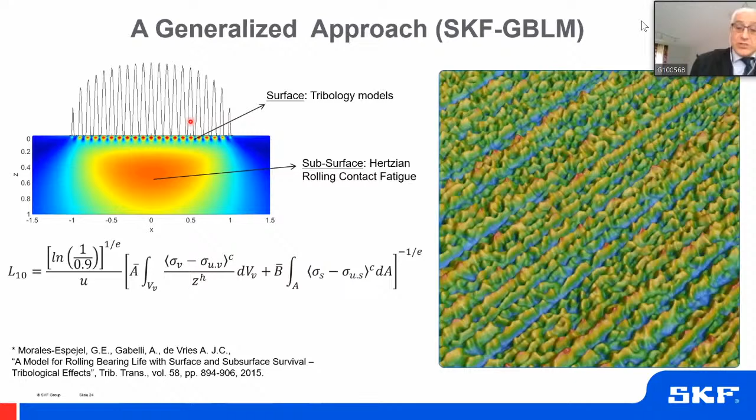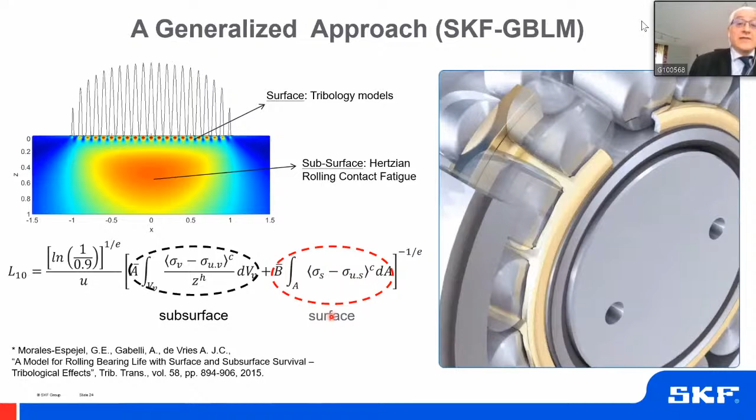But nowadays, we try to introduce the surface in the formulation. So basically, you have two damage integrals, one linked to the subsurface and one linked to the surface. In this way, we have much more flexibility. For instance, this integral can very well be calculated with a sophisticated numerical model, as the one you have seen before for surface stress.

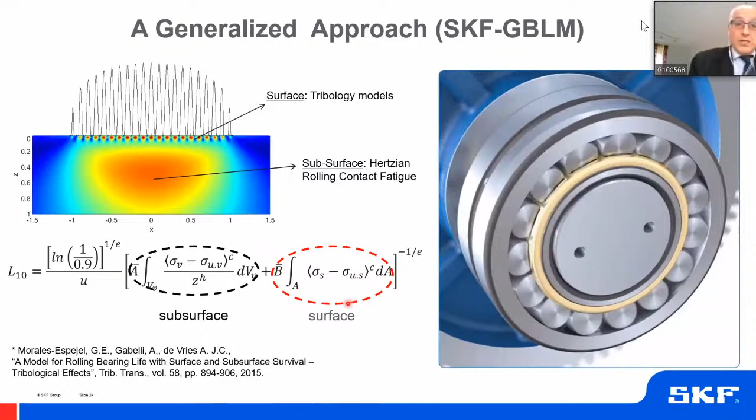Now, applications of this concept. We have used this concept, for instance, to assess the effect of individual indentations that we can measure in a raceway. We have also used this concept to assess the life of hybrid bearings, which have a very interesting tribology, very different from steel, so it's also considered in this model. And also the extension of this concept for gears, that is also a reality.

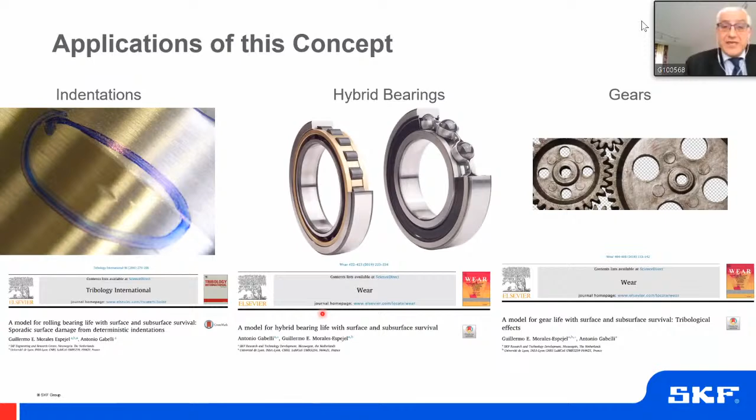So I invite you to read these papers, and I hope with this you will understand this concept a little bit better. With this, I just would like to finish with my conclusions.

So basically, you can see that when it comes to electrification due to mobility, most of the tools that we need to model those phenomena in the contact are already there. We need to use it. Another important conclusion is that the tendency nowadays doesn't seem to be just to understand a single tribological situation or phenomenon, but actually the interaction of those and the competition of those phenomena are important for us to understand how to model failure modes, because there is always competition of different things.

Now, the other important conclusion I could say is the tendency nowadays is to consider more realistic aspects of the materials. Materials are heterogeneous, polycrystalline, but also the lubricants—their actual rheology is important. And finally, there is a tendency to actually separate the surface aspects from the subsurface when it comes to the modeling of rolling contact fatigue.

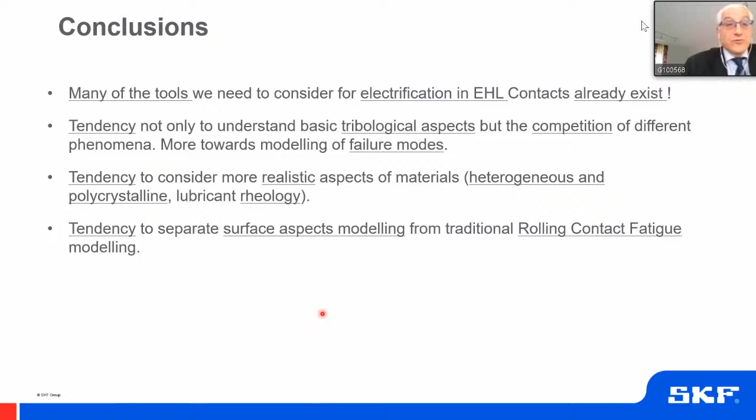And with this, I would like to finish my presentation. I'm ready for questions. Thank you very much, Guillermo. So there's a couple of questions from our listeners.

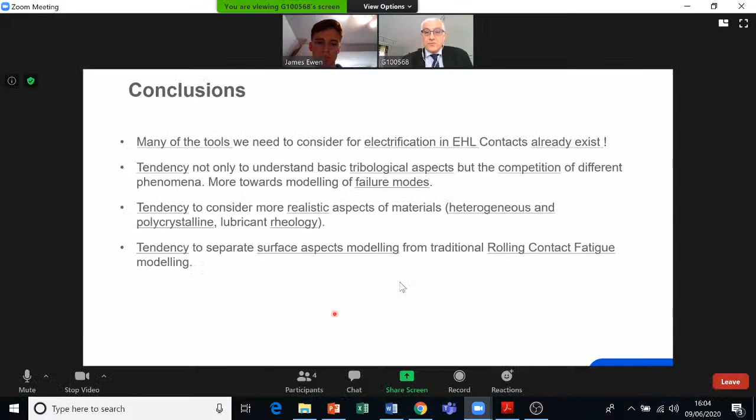Ryan Notai asks, do you think there are any tribological concerns with increased battery power? For example, concerns with electrical damage at higher outputs? Well, electrical damage has always been a concern, and I think if we increase the power, it becomes even more. Yes, now the solution that we recommend, that is obviously the one that has no defect, I would say, is to use hybrid contacts, hybrid bearings, for instance.

Electrical current cannot go through them. They have a fantastic tribological performance. They are, yes, a little bit more expensive, but it all depends on the particular solution that you are pursuing.